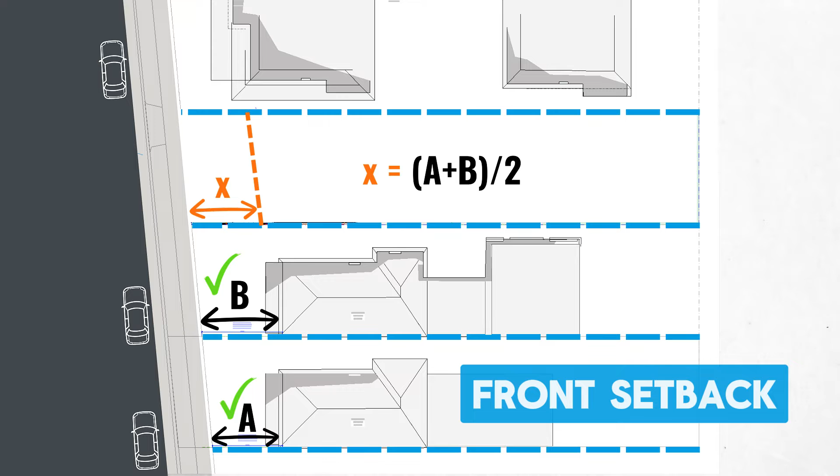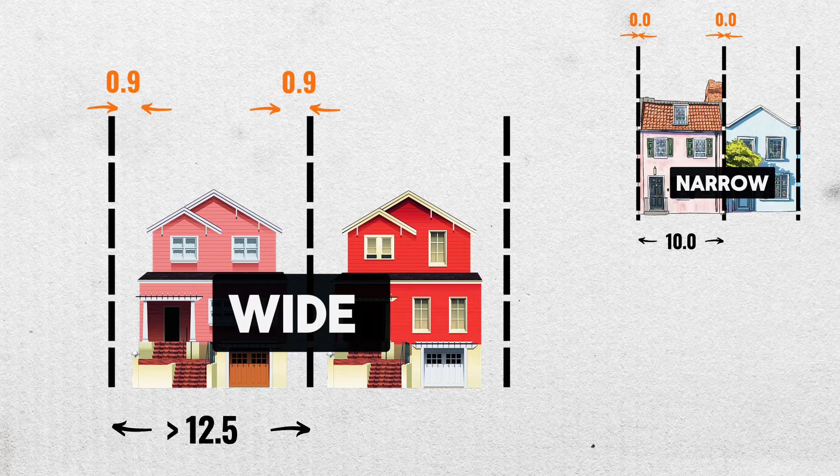So first, we'll establish the front setback, which in this scenario is the average of the setbacks of the adjoining properties. Next, we'll determine the side setbacks, which can vary depending on the lot width. Narrow lots permit building to both boundaries, whereas wider lots require setbacks to both boundaries. And for lots in between, building to one boundary is permitted, which applies in our case study.

Then to conclude, we'll prepare shadow diagrams and check the solar access of an adjoining property before and after the new home is built, checking that the living area and the private open space receive the minimum required sunlight.

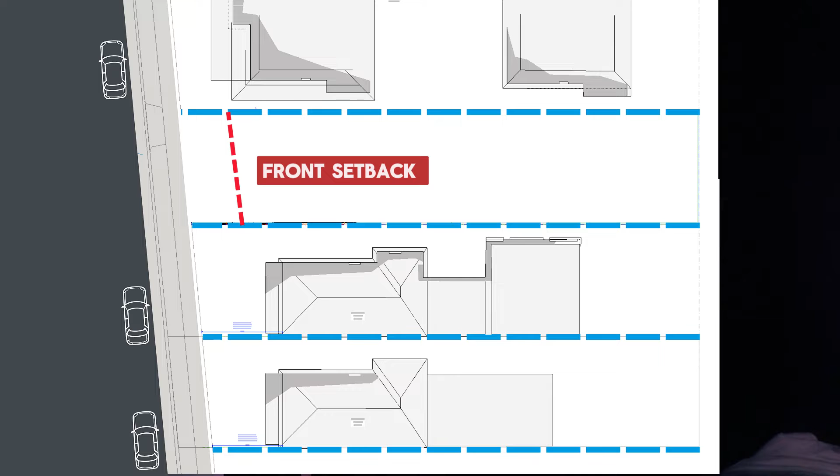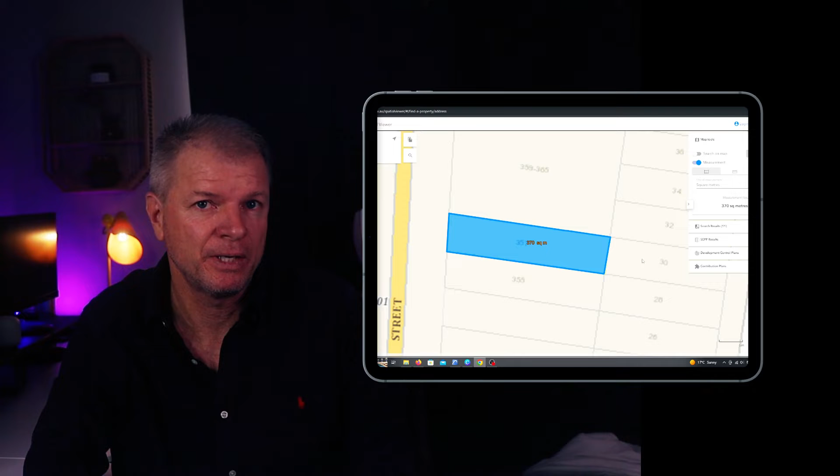So first, we'll establish the front setback. The planning policy applicable to this lot sets out requirements based on the lot's area. The lot's area is shown on the site survey, or can be measured roughly using a geographical tool online. Our lot has an area of 370 squares, therefore the building's front setback must be the greater of 4.5 metres from the front boundary, or the average of the nearest two properties within 40 metres.

In this scenario, the two properties to the south were selected to be representative of the front setback, and the average of their setbacks applied to the subject site, which is about 6.5 metres. The property to the north was not used because it was built in more recent times, and it is a townhouse development, and it is not considered representative of the street's characteristics.

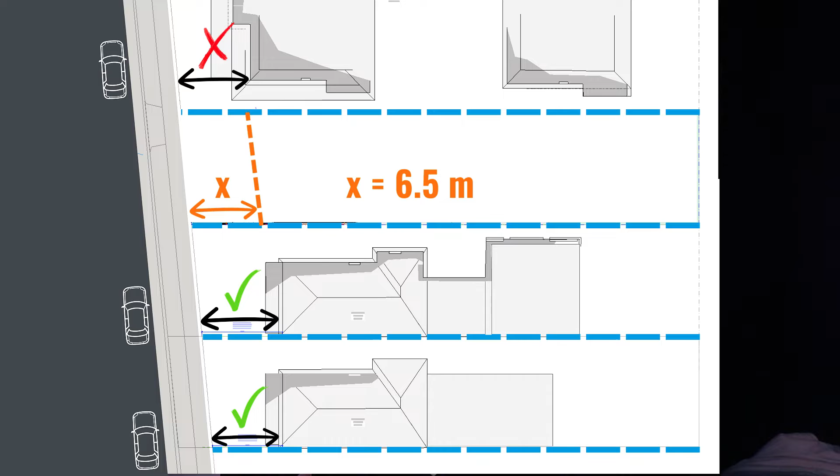This is an important distinction to make early in the design process. It has the effect of pushing the front setback several metres deeper into the property. If design had progressed using an incorrect setback, this would likely lead to abortive design, attracting more time and cost during early design phases. Now let's establish the side setbacks.

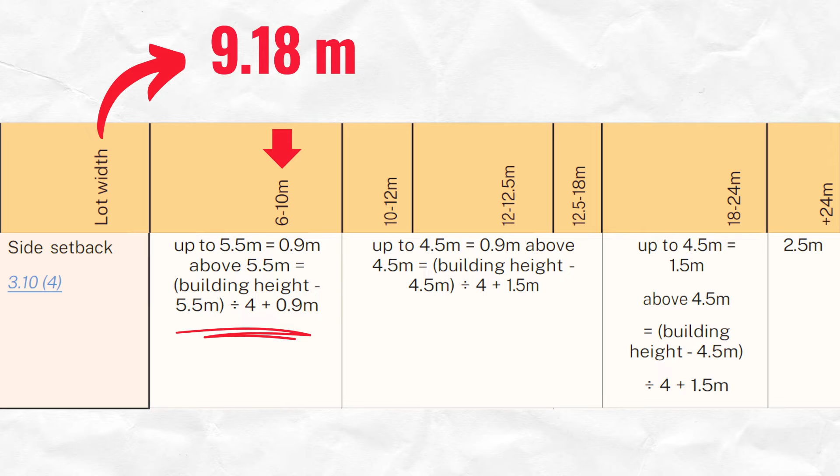Planning policy sets requirements based on lot width. Our lot has a width of 9.2 metres, a dimension provided on the site survey, but can also be measured using geographical tools online, however with limited accuracy. Once this is known, we look up the applicable setback, which is 900 for the first 5.5 metres of height, then increases at a rate of 1 in 4.

Now, because this lot is less than 12.5 metres wide and there is no building within 900 on the adjoining lot, we can build to one boundary, to a height of 3.3 metres, after which the 900 setback applies. These setbacks are often shown on section drawings, helping illustrate how the proposed new building position is compliant.

Another key constraint on this site is to maintain at least one car space, which must be located 1 metre behind the front building line. So we'll represent this car space adopting the minimum standard dimension of 3 by 5.4 metres and avoid encroaching in this zone.

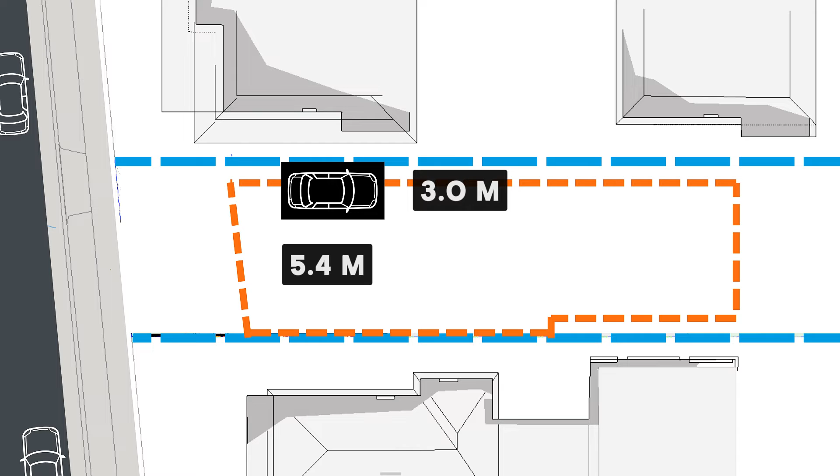With the front and the side setbacks established, spatial and concept planning can progress, making sure that the proposed building envelope remains inside the building location zone and heights are measured relative to the existing natural ground level. Building height at any given location is measured from the natural ground level directly below, which will be recorded on the site survey. Now onto shadow diagrams.

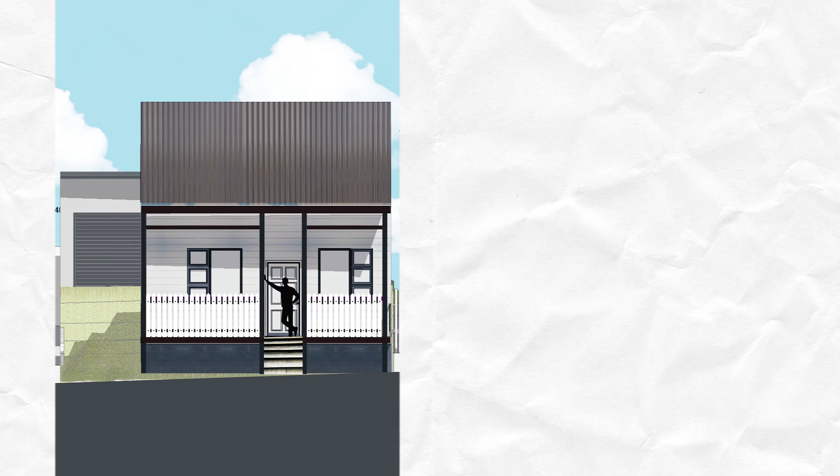We'll evaluate two solar access controls. The first control checks whether a minimum of 2 hours of solar access is maintained to the main living room glazing between 9 AM and 3 PM on the 21st of June, being the winter solstice when the sun is at its lowest altitude.

To evaluate this criteria, the existing and proposed house must be modelled in 3D, as well as the adjoining property, and care must be taken to capture fenestration, the eaves, gutters and ridge lines with good accuracy, and the project must be oriented relative to true north. The project's location is selected, the day and time is set, and shadows are rendered and evaluated.

Then we examine the living room glazing during the hours of 9 AM and 3 PM. In our example, a portion of glazing is impacted from the new house in the morning and in the afternoon. However, there is no change to the clerestory windows, therefore this control is satisfied.

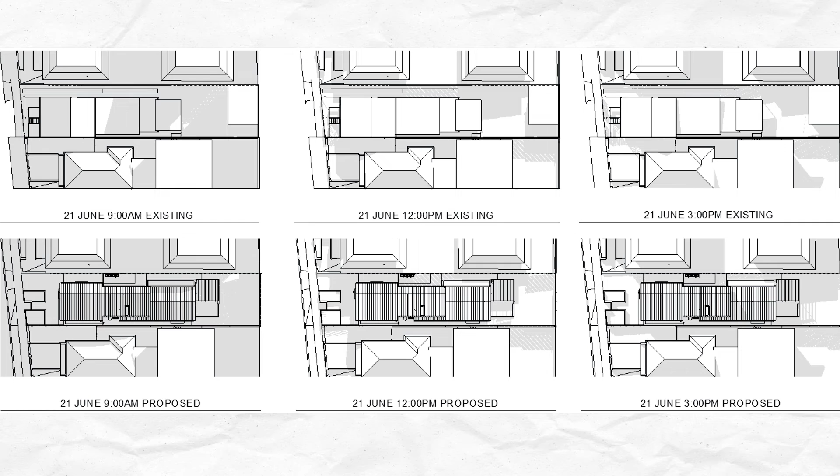The next control relates to solar access to the private open space. We need to maintain 2.5 hours of solar access between 9 AM and 3 PM to at least 50% of the private space. Again, shadow diagrams are rendered at 9, 12 and 3 PM, before and after, but this time from a top view, allowing the private open space to be examined. The extent of the shadows are unchanged, therefore this control is satisfied also.

Solar access assessments can be much more involved than this and often require shadow diagrams at hourly intervals to better understand their true impact. So that brings us to the end of this video, folks.